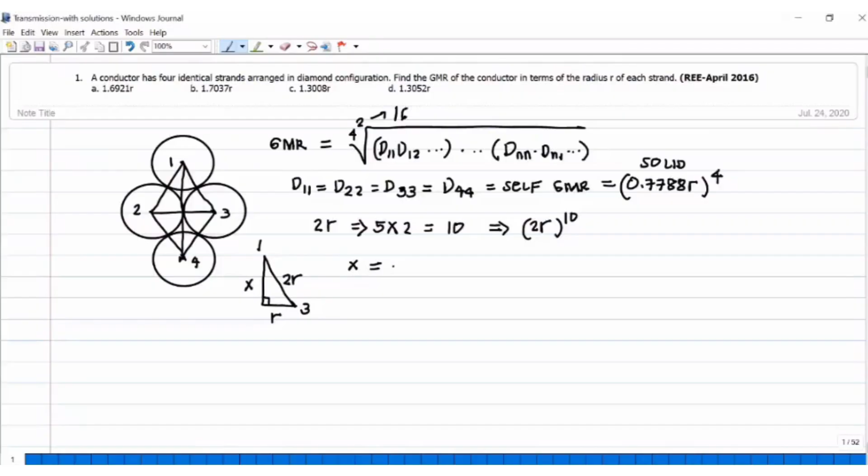I-analyze natin yon, so dito yung tangent angle, so 90 degrees yan. So, ito yung X. Yung line na yan, 1, 3. So, itong kalahati nito, yung 2, 3, yung kalahati niyan, R. Yung 1, 3, 2R. So, yung value ng X using Pythagorean theorem, that will be 2R, the quantity squared, that is the hypotenuse, minus the square of the other side, R squared. So, that will be square root of 3 times R.

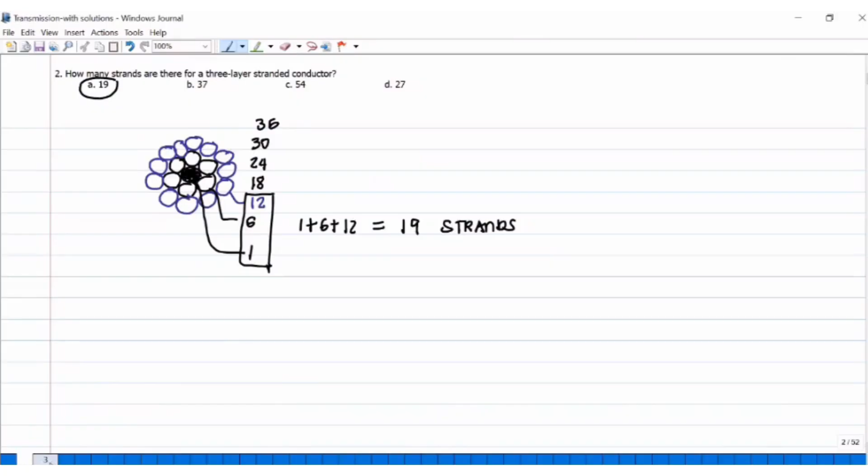Okay, number 3, an unconventional conductor consists of 3 identical conductors arranged in vertical configuration. Calculate its GMR. So, binigay na rin yan sa board exam, September 2015.

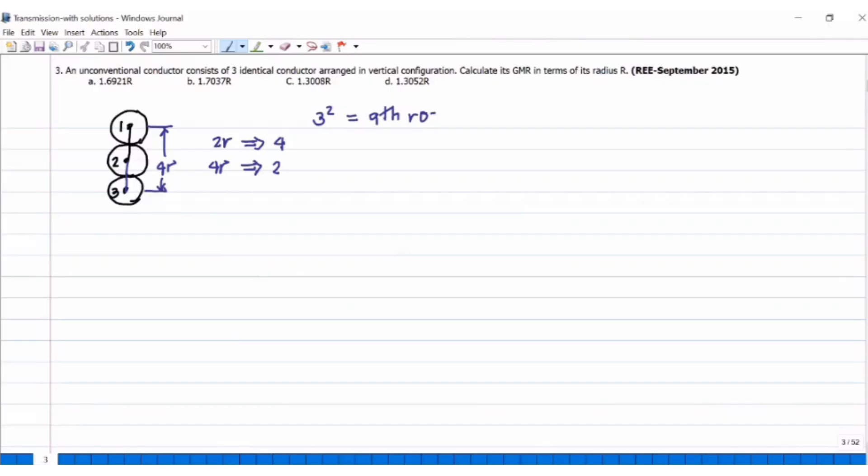Yan ang basis mo. Ano pa yung kulang na tatlo? Yung 0.7788R. This is N yan. Ang N natin ay 3 conductors. So, therefore, the GMR is equivalent to the 9th root. What is 9th root? What is 9? 3 squared. Then 0.7788 times R raised to 3.

Kung ilang conductors yan, tatlo sila. Then yung 2R raised to 4. Then yung 4R, dalawa, kaya squared. So again, R 3 plus 4 plus 2, 9. So safe na siyang i-9th root. So 9th root of 0.7788 raised to 3, times 2 raised to 4, times 4 raised to 2.

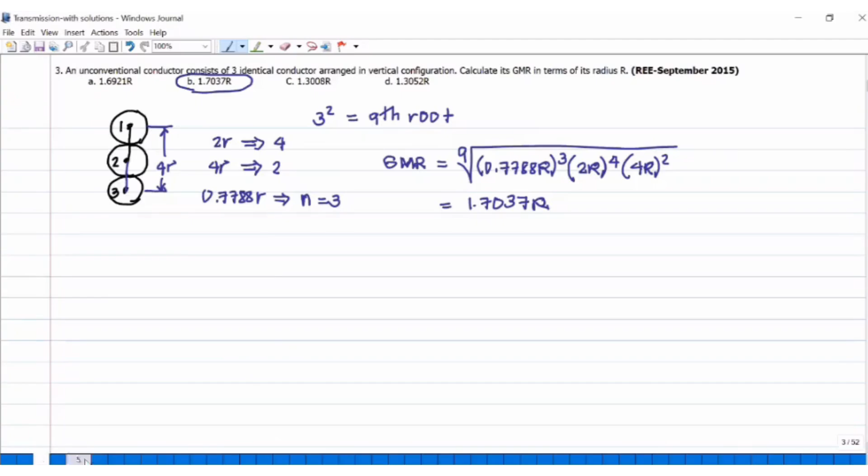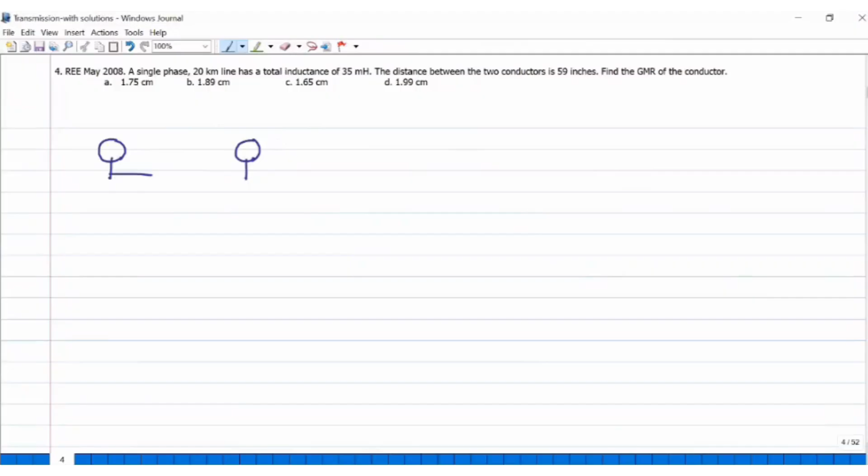So, number 4, single phase. A single phase 20 kilometer line has a total inductance of 35 millihenries. The distance between the two conductors is 59 inches. Find the GMR of the conductors. So, halimbawa, ito yung isang conductor. Pag single phase, ilang conductors? Dalawa. Ito yung distance ng center nila. So, yan yung magiging geometric mean distance natin.

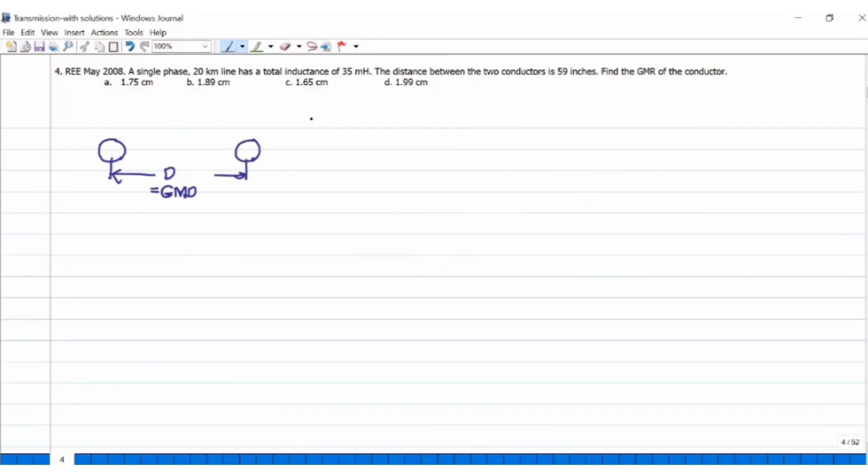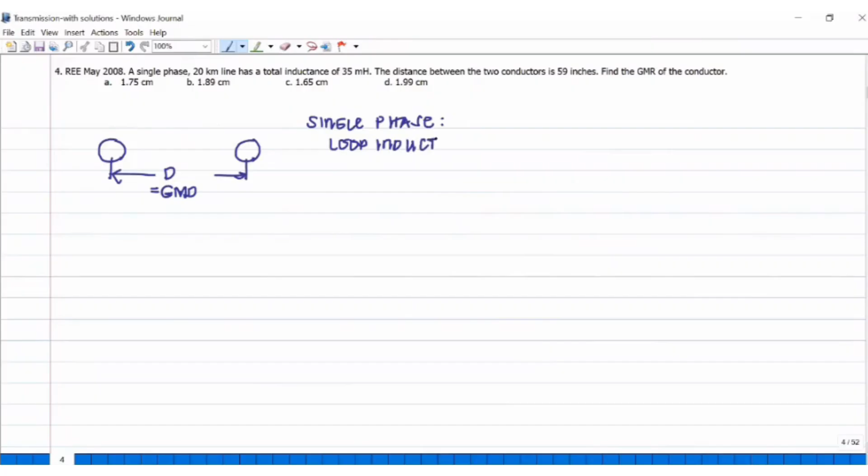So, for single phase, ang usual na kina-consider ay yung loop inductance. Pag sinabing loop inductance, kasama yung dalawang linya. So, ang total inductance will be equal to 0.4, or 4 times 10 to the negative 7, times ln of the GMD divided by R prime or GMR. Ang unit nito is millihenry per kilometer. Dito napunta yung 1 million. Milli-kilo. Kaya 0.4 times ln of GMD all over GMR.

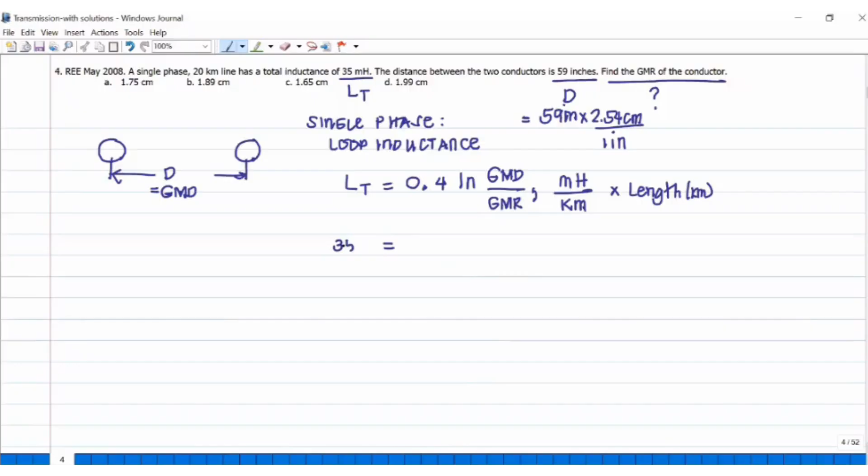So, i-substitute natin yung total inductance LT is 35 millihenry. Then, 0.4 times ln of the GMD, 59 times 2.54 centimeters, divided by the GMR. Then yung length, i-divide natin, 20 kilometers, millihenry per kilometer. Consistent na yung unit for both sides. Pag sinolve natin yung GMR, 35 divided by 20 divided by 0.4, shift E, then inverse, times 59 times 2.54.

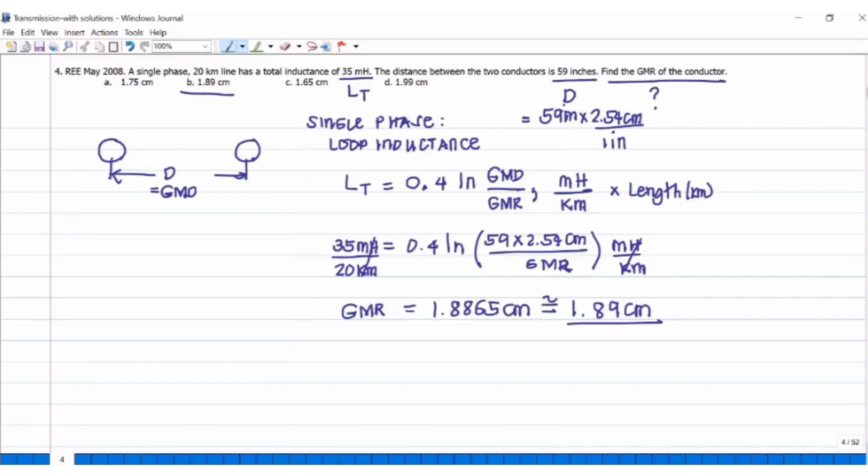So 1.8865 centimeters or 1.89 centimeters. So the answer is letter B. Pag single phase, 0.4 yan, times 2 ng 0.2, ln GMD all over GMR. Yung GMD ng single phase, yung distance between their centers, which is 59 inches. Okay, next.

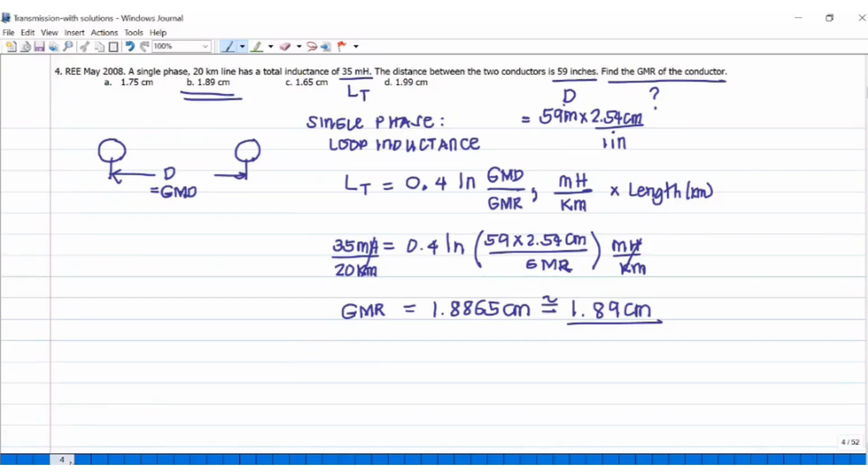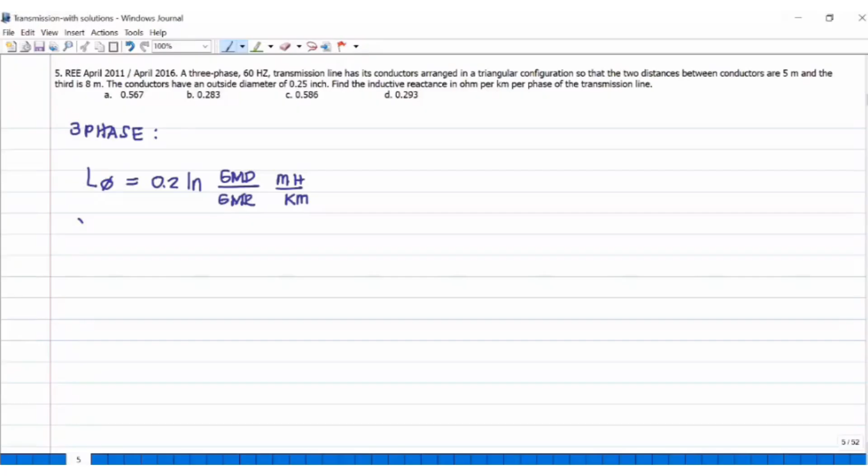5. So, yung 5 naman, 3 phase siya. Pag 3 phase, ang makakompute natin yung L per phase. So ito na yung 0.2. This is 2 times 10 to the negative 7, Henry per meter. Pero kinonvert ko na siya, kaya 0.2 ln of GMD divided by the GMR, millihenry per kilometer pa rin. Tapos tinatanong yung XL per phase. The formula is 2 pi times the frequency times the inductance per phase.

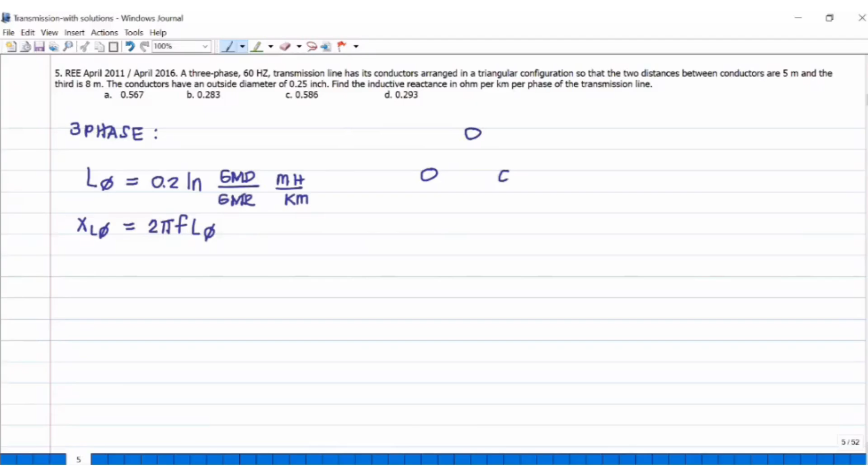Kung 3 phase, consider na natin na completely transposed. So, ang GMD nito is equal to the third root of distance 1-2, distance 3-1, and distance 2-3. Ito yung mga distances ng centers. So, cube root of D12. Dalawang distances na 5 meters. So, 5 meters squared times 8 meters.

So, that is equivalent to cube root of 5 squared times 8. So, 5.848 meters. Okay, pag yan na yung value ng GMD, pag yung GMR, consider natin na solid. Pag solid, ano ulit yung GMR? So, 0.7788 times the radius.

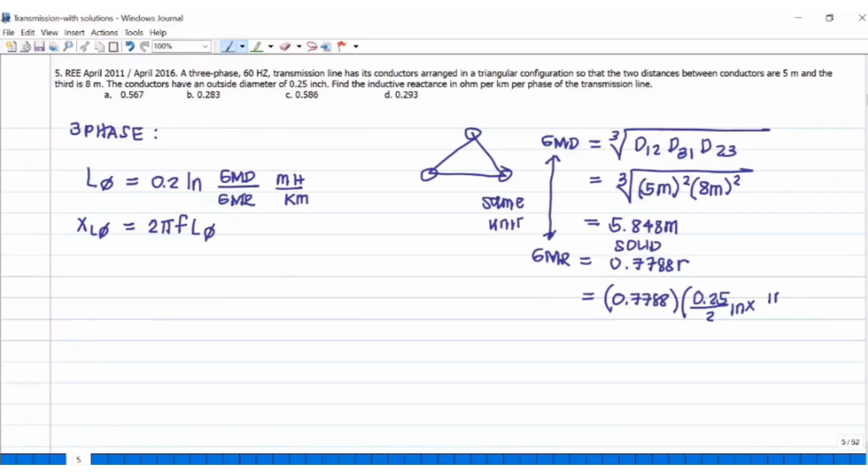That will be 1 meter is equivalent to 39.37 inches. So yan yung GMR na ilalagay natin dito. That is in millihenry per kilometer. So L per phase is equivalent to 0.2 times ln of the GMD, 5.848, then divided by 0.7788 times 0.25 over 2 divided by 39.37 inches in 1 meter.

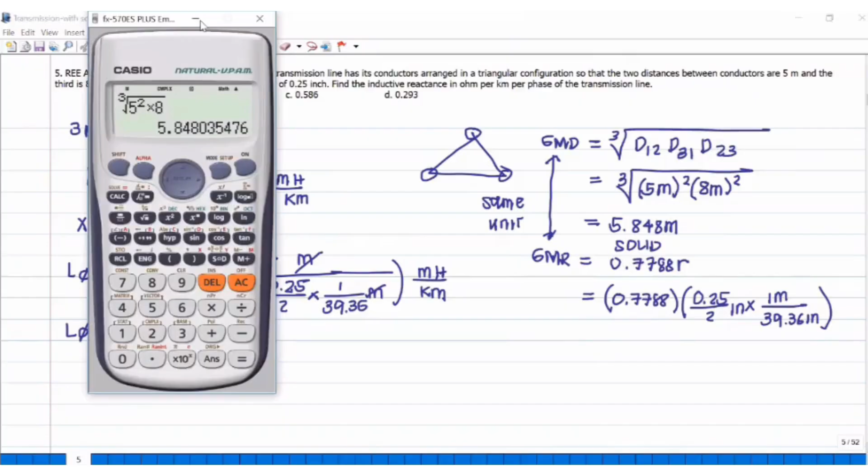So yung whole unit ng denominator ay meters. Tapos dun sa numerator, meters din. As long as the same unit yan, kahit naka-feet, naka-centimeter, meter, inches, okay, basta the same unit yung GMD at saka GMR before proceeding to the ln function. That will be millihenry per kilometer. So the total L per phase is equivalent to 5.848 divided by 0.7788 times 0.25 divided by 2 divided by 39.36. Yan yung nasa loob ng ln.

So ln answer times 0.2, 1.5537 milli. So times 10 to the negative 3. So nilagay ko na yung times 10 to the negative 3, naka-henry per kilometer na to. Para pag nag-compute tayo ng XL per phase, diretso na. 2 pi times the frequency 60 times 1.5537 times 10 to the negative 3. So this is now in ohm per kilometer per phase.

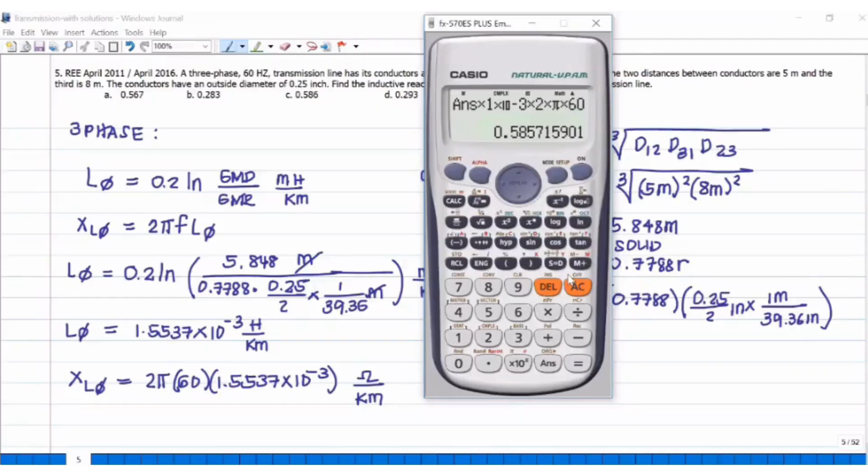So times 1 exponent negative 3, hindi tayo nag-convert. Times 2 times pi times 60. So dire-diretso lang yan. So, ang sagot ay 0.5857 ohm per kilometer per phase. So yun, XL per phase, 0.586. So binigay na yun sa board exam. Mga ganyan ang binibigay sa board exam.

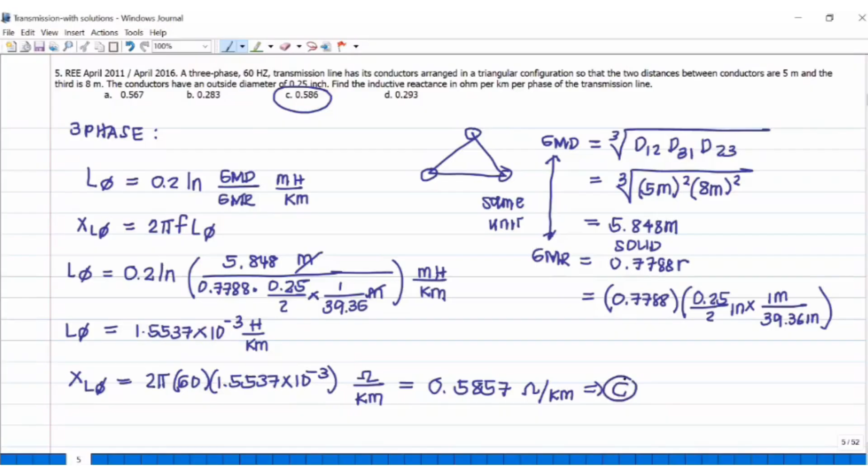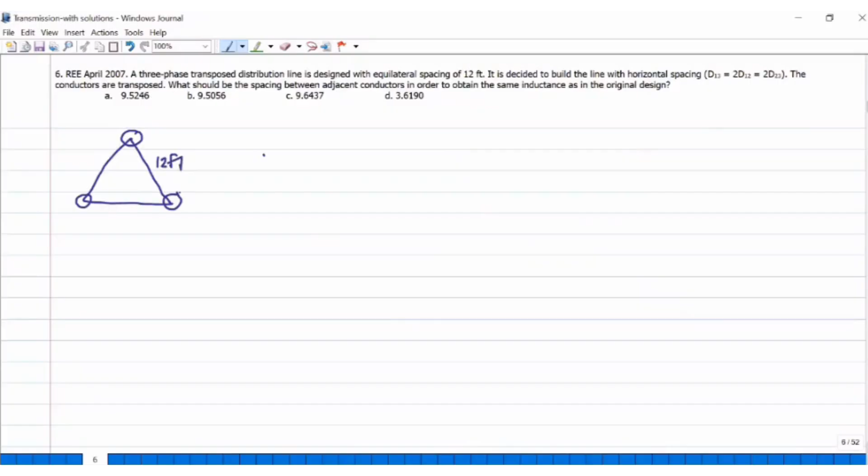Next, 6. A three-phase transposed distribution line is designed with equilateral spacing of 12 feet. It is decided to build the line with horizontal spacing D13 = 2D12 = 2D23. The conductors are transposed. What should be the spacing between the adjacent conductors in order to obtain the same inductance as in the original design? So una, naka-triangular muna sila. So dito, 12 feet, 12 feet, then 12 feet.

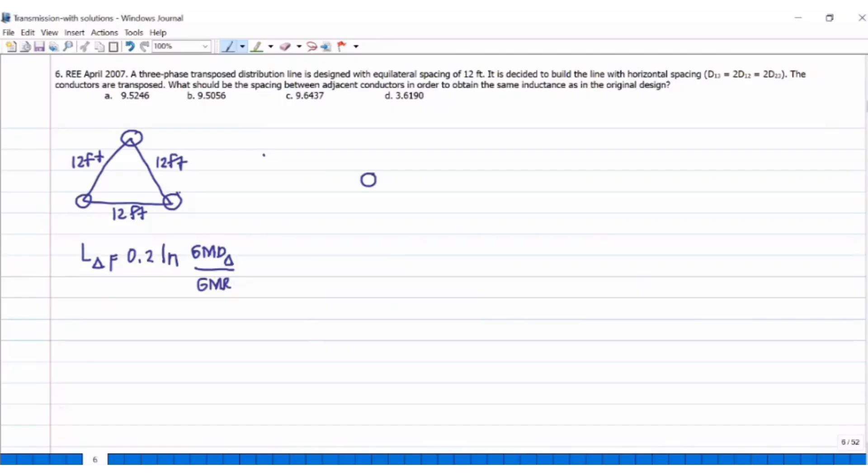Tapos mayroon tayong mako-compute na L ng triangular is equal to 0.2 times ln of GMD of the triangular divided by GMR. Yung GMR ng conductors pare-parehas lang doon sa naka-horizontal. So ito daw ay D, then D din, then dito 2 times D. So yung GMD nito is the third root of D times D times 2D. That will be cube root of 2 times 1 adjacent distance.

So kung i-compute natin yung L ng horizontal, that will be 0.2 times ln of GMD for the horizontal over the GMR for the horizontal. Yung dalawang to equal. Okay? So pag sinimplify natin yan, yung GMD ng triangular is equal to the GMD of the horizontal. Magkakancel yung 0.2, kakancel din yung GMR, kasi parehas lang naman yon. Yung GMD nito, cube root of 12 times 12 times 12. So equal to 12 pa rin.

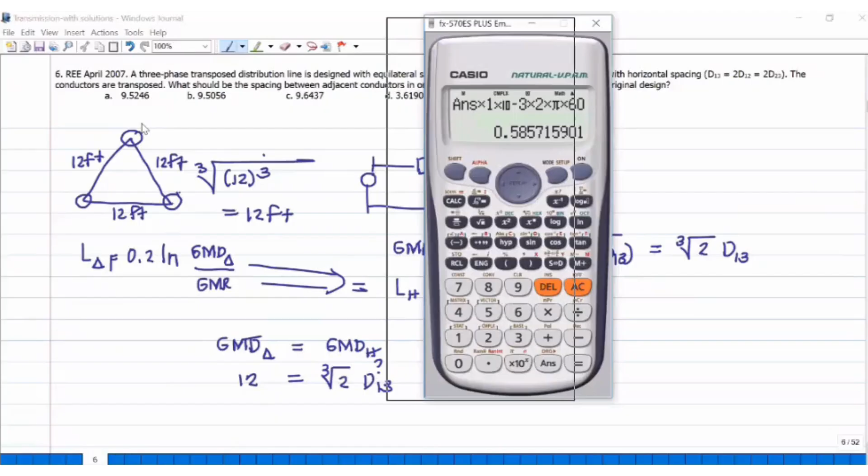Pag equilateral triangle, just consider one distance. So 12 feet. So 12 is equivalent to cube root of 2 times the adjacent distance, which is now the unknown. So therefore, D is equivalent to 12 divided by cube root of 2. Yung GMD ng kabila, divide nyo ng cube root of 2. So 12 divided by cube root of 2, 9.5244.